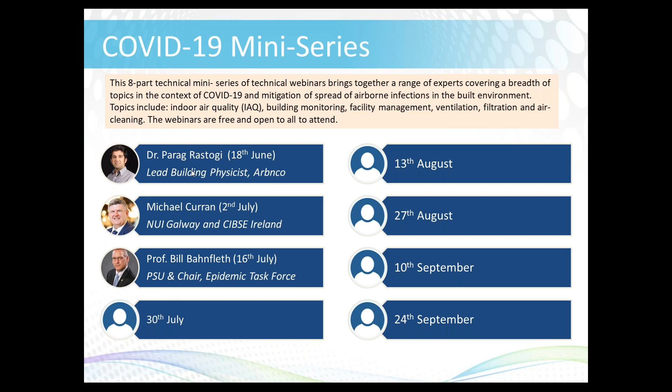So over the next couple of months, this is the first in an 8-part mini-series of webinars, which will run every 2 weeks between now and September. We're hoping to bring together a range of expert panelists covering topics related to reducing the spread of airborne infections in the built environment. The first 3 speakers are confirmed, including today's speaker, Parag. The topics over the next couple of months will include indoor air quality, building monitoring, facility management, ventilation, filtration, and air cleaning. And all of these webinars are free and open to anyone to attend.

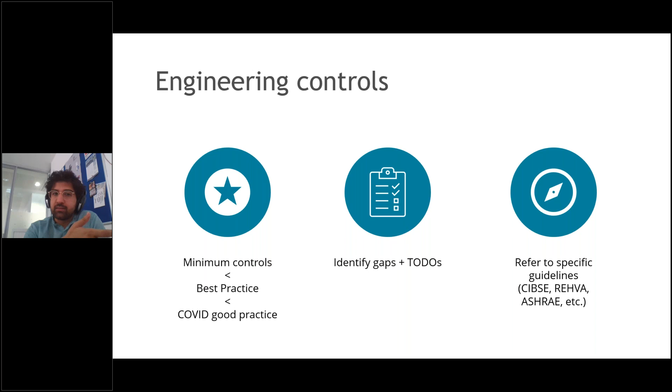Look them up. There's always scope to follow those. We'll keep the questions for later, so I'll move on.

So just to talk about specific engineering controls, I'll give a few examples from our own experience. The top engineering control that all societies are recommending now is increasing outdoor air ventilation to dilute pathogens.

Right? So the idea being, a person who's carrying the virus comes in, they shed viruses, and we have well-documented cases of people shedding when they talk, when they sing, when they shout, when they're just breathing. And that's not to say that you're somehow culpable for it. You may have no symptoms, you may have no idea, you have not been tested. So people are shedding viruses. That's something we have to accept, and we can't seek to control that 100%.

So increasing window ventilation, where possible, kind of achieves the same outcome, right? Outdoor air ventilation, one way of doing that is window ventilation, and no recirculation. And the reason this has come into the picture is, imagine you walk into a conference room. When it's been occupied for a while, you can smell the people. Your nose is a good detector. It tells you that the air is not fresh.

Now imagine that air is being recirculated to other rooms through the mechanical system and pumped back into the space. The things that you could smell, think of them as tracer gases. I'll give you an example in a second. And that is a good indication that if those gases can move with that air, then so can viruses, right?

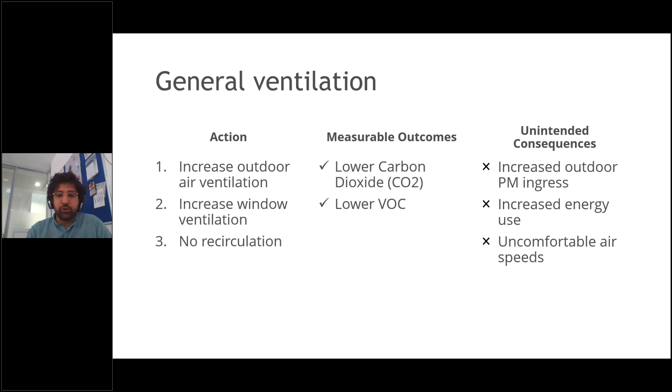So enough talking, let me get to an example. This is an office in Singapore operated in classic fashion for a hot and humid climate in Asia. They pre-cool in the morning and keep the temperature high by the standards of the UK and Ireland, but it's okay for people used to hotter climates. 27 degrees Celsius is not a bad thing. They overcool in the morning before people come in, then maintain that and let it slide a little bit.

But if you look at the CO2, it's a different picture. There are very serious ramps of CO2 every morning, and the level is persistently high. The ASHRAE minimum outdoor air requirements correspond roughly to a CO2 level of 1000 ppm, so they are barely meeting the minimum most of the time. We're not even talking about COVID good practice yet, just the state of the art. The humidity is on the higher end of what's recommended, and that's fine. We'll ignore lighting for now; that's not the focus of this project.

Just to give you an example of what that looks like. So in this particular snapshot, I was looking at every sensor in that office. It's a fairly big floor, and the office is spread over the entire floor. In fact, there's a couple of sensors on another floor as well. So this is really an overall view, which is why you should see some variation.

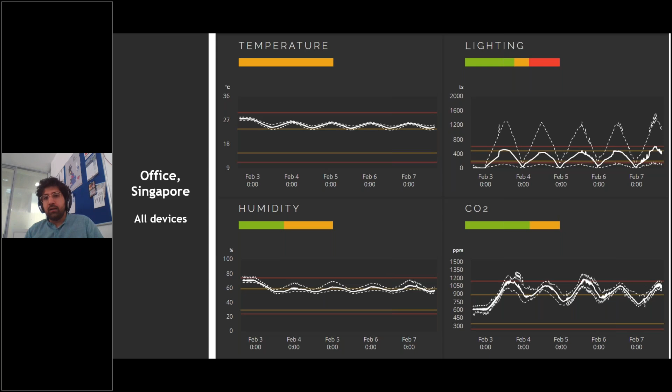What's amazing is you don't see a lot of variation, which means obviously that they have very good control. And so there might be a few outliers, some rooms that are behaving quite differently, but by and large, the office is very well controlled. So when you look at an individual meeting room, again, they were very concerned about humidity and temperature. And our feedback was, it's fine. There's nothing wrong with the humidity and temperature. You're doing a very good job of controlling it.

But look at the CO2. This kind of CO2 profile tells me that meeting room is either always crowded, or the ventilation system was not designed for the occupancies which are actually being practiced at this particular meeting room. So this for me is a red flag to say that, well, your ramp of CO2 is very steep. The CO2 level climbs very fast. Your ventilation system is not keeping up.

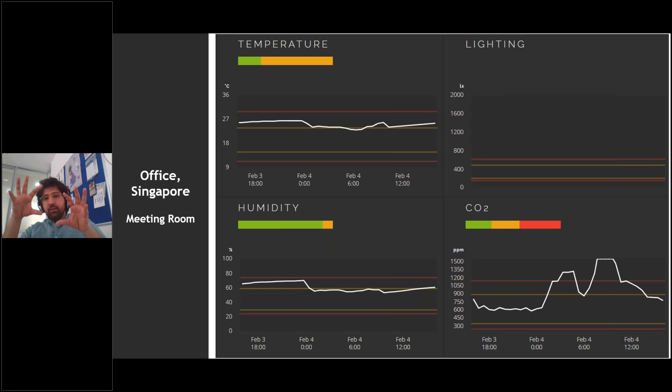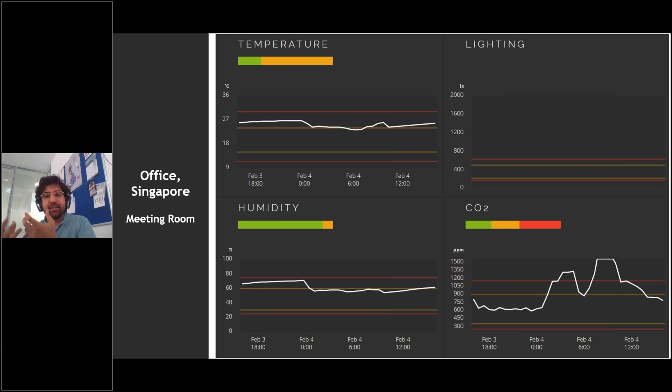You are not diluting the pathogens if there are pathogens in here, which is increasing, on the multi-parameter sort of calculation, the probability of infection. Fresh air is an aspect, and that aspect is actually suffering here.

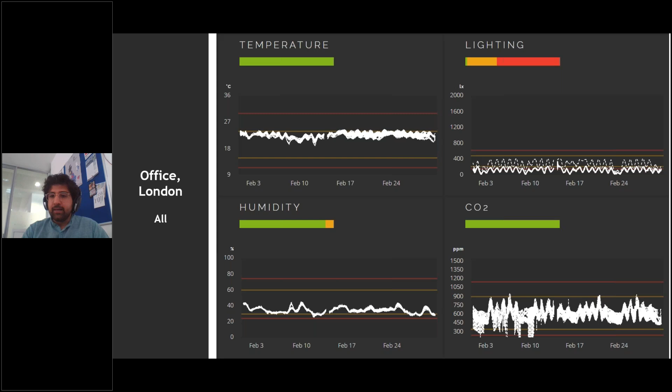But if you look at one conference room, actually, then the picture is quite different. So this is roughly the same time period. This is like end of Jan, or Jan, Feb in this case. So even though the overall picture was fine, if, for example, you had taken a spot check, you could have just by chance been in a place that was fine. There was nothing wrong with that place.

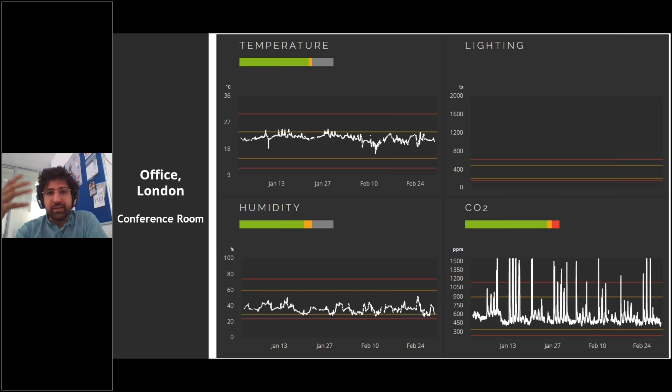And we actually had this discussion with another client who showed us a report of their spot check of the VOCs, so volatile organic compounds, pollutants in their space, and they said that it's fine. And yes, the report looks fine indeed. There's nothing wrong with it. But when you actually look at the continuous monitoring results, you find that there are points in the day where it is fine, and there are points in the day where actually the VOC levels are really quite bad.

Now, is that a serious problem? Well, I don't know until I go on site. I mean, I don't need to go on site, but the client goes on site and figures out where are those VOCs coming from? Are they from cleaning products? Are they from furniture and so on? So the point of that aside was that individual spaces in an office might have actually radically different behavior from the rest of the office.

So when we talk about verifying and measuring things, your policy, which is for the entire office, may actually not work out at all for a particular space in the office. And so you just look at the ramps that you get and the peak load, as it were, of CO2 that you get in this particular conference room.

And this graph was great for me as sort of a validation, because when I presented this to the client, this graph immediately caught their attention: oh, we kind of anecdotally knew that our conference rooms were getting a bit crowded and sort of warm and stuffy, but this is just plain to see that every time that conference room is used, pretty much it's overcrowded and the ventilation's really not keeping up.

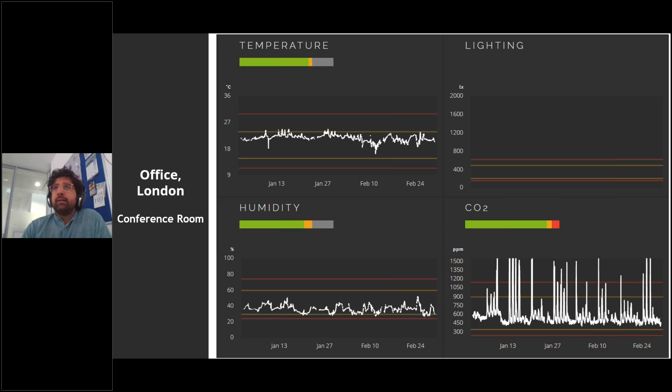Just to give you an example of the fact that when this room is not occupied, it does go back to fresh air levels. So I guess I'm trying to say I'm not making up that data.

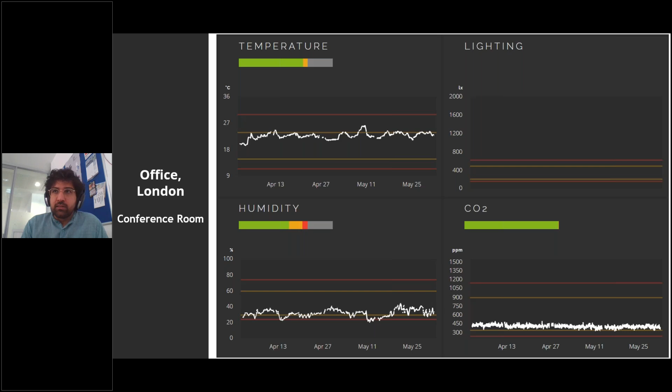So if you look at that same conference room in April and May, when that office was shut down, we know for a fact that it should be at the background levels because nobody's in the space to produce CO2. Now, again, CO2 is produced by a person in the space. So if there's no people there, there's no CO2 in that space. Also, there's no viruses being produced there because there's nobody to produce those viruses.

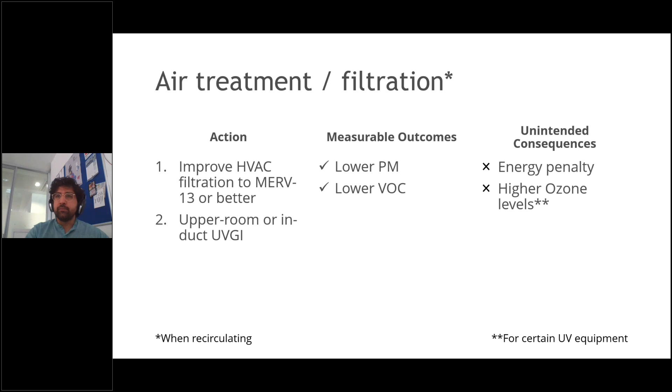Just to give you an idea of how you think about recirculation: while in an ideal world I would never mix air between zones, that's not really realistic in most offices. I'll use this office as an example because they are actually a site office in central London. There are still about 30 to 50 people who work in that office regularly, and they have to work there for almost a year. So their health, well-being and productivity is being affected by this office.

If you walked into their office, you would understand immediately that there's something wrong with the ventilation, because there is absolutely no way they can avoid recirculation between spaces, because of the way it's constructed and the constraints of the site. They're actually a construction office; they're supposed to get out of there when the construction is done.

To give you an example of the lack of fresh air in that office, and where perhaps air filtration could actually be beneficial, look at their pre-lockdown profiles of CO2. Looking at the overall picture again, they're really, really high. And in this case, I know why that's happening. It's because there's terrible ventilation and a lot of mixing in that space.

The PM level is not too high, but it's way higher than most offices should be because it's right next to the construction site, and there was no curtain between the construction site and the office to prevent the dust coming in. What's interesting is that most of April there was virtually no activity. Nobody was in the site office, and then they started coming back to work little by little.

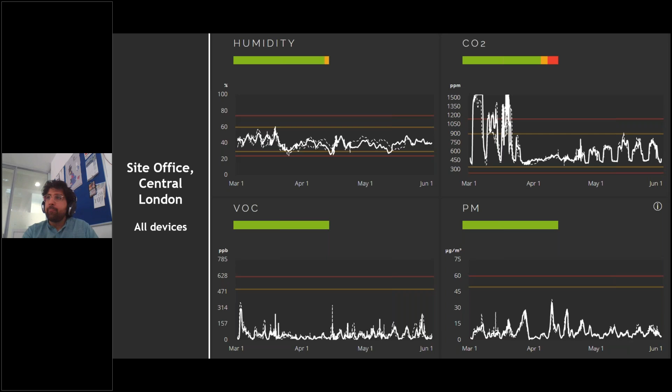I think this is the office I was talking about earlier in London again. Speaking of recirculation, in this case let me use a slightly left-field example of VOCs as a tracer gas, because obviously I can't measure viruses, right?

So going back to our first office that we discussed, which had the conference room behaving completely differently from the overall. Let's look at that office again, and we see that the CO2 level background is fine. It's below. There are some small spikes. It's a lot of data bunched together, which is why you can't see individual lines. But by and large, almost all the sensors are at background levels because virtually nobody is going into the office.

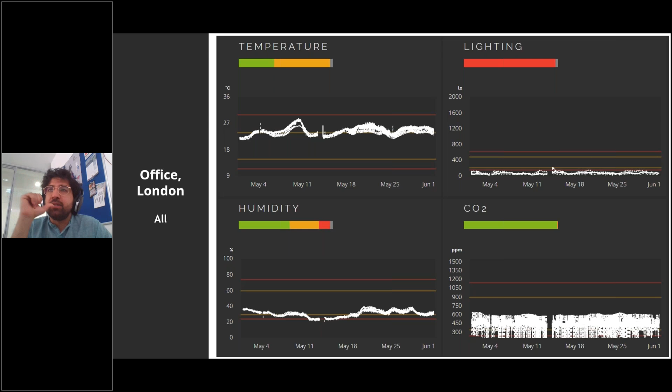It's very sporadic occupancy. However, in May, there was a heat wave, right? So we have a sensor in that office in the reception area, and the reception area is fully glazed. What that means is that we had a lot of VOC production. This is not cleaning because there's nobody going in there. This is not food. This is purely temperature-related off-gassing.

Now, why am I going on about VOC? Because this is a perfect example of where something that's generated in the reception will now propagate throughout the space because they're all connected. So even though technically there's no mixing happening, some amount of recirculation is inevitable. So this is a kind of tracer gas, as it were, that we could use to verify whether things are moving from one zone to another.

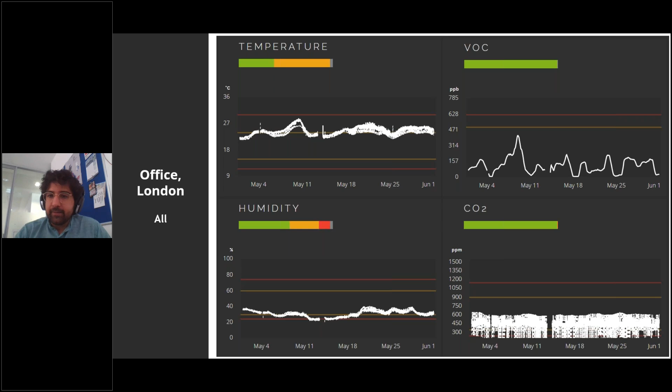Moving on to local air treatment, I won't spend much time on this. That's not really part of my expertise, but the current guidelines do tell you that you can use portable room cleaners with heavy caveats, and I would recommend looking at the CIBSE guidance and the ASHRAE guidance on when this is actually effective. For example, the CIBSE guidance says more than 10 square meters is unlikely to be effective.

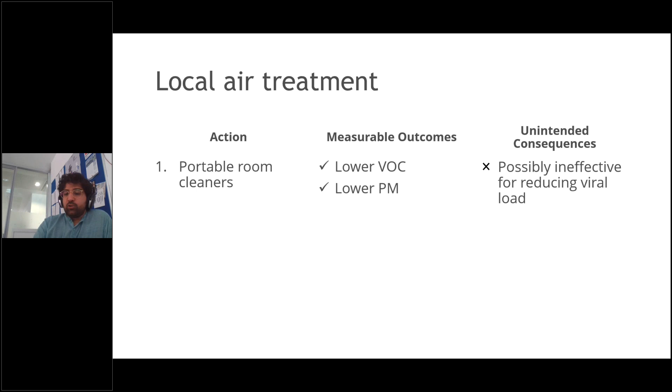Because think about it this way: you have this relatively tiny cleaning device, and it's trying to get the air through it. And if you just have a lot of airflow and a big space, how much effect is it actually going to have? So yeah, I said possibly ineffective for reducing viral load. And of course, source control and elimination.

This is one aspect that a lot of people don't like to talk about, but I think it's worth talking about because it is quite important to remember that a big way of transmitting viruses of any sort, not just COVID, is actually the fecal oral route. So when you visit the toilet, you smell things and it's unpleasant. To quote my friend Dr. Jovan Pantelic, if you could smell the viruses, you would realize how smelly a toilet actually is. So the smells are giving you a proxy for the lack of ventilation.

So you really have to think as a building owner, building operator, an engineer, that toilet exhaust has become even more important than it used to be. It was always important. There are other viruses and bacteria that can be transmitted from toilet usage, especially in public toilets. And I'm not talking about surfaces, I'm talking about the aerosols. You have to really look at how your toilets are generating aerosols. There are different technologies of toilets, what the exhaust is doing, whether the exhaust is actually being extracted and thrown out into the outdoor air or not.

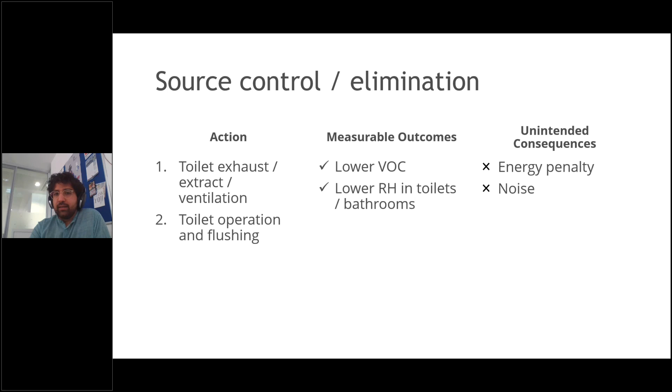And that's something where, again, there are some measurable outcomes. And in all of these, energy penalty is something that we have to be careful about, although I would argue that it's not as bad as most people think in terms of energy outcomes. So again, looking at our favorite office in London. I like this office because I happen to go there a lot, so I know it very well, and we have our sensors in that space.

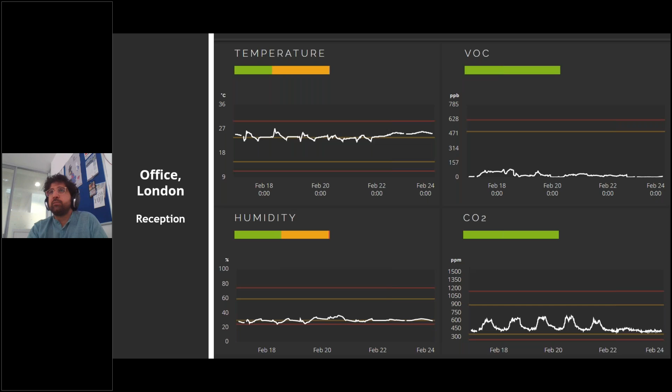An example of when suddenly you could have spikes if you were to walk into an enclosed space is the reception area. I said it's connected to all the other spaces, but the moment you shut all the doors, it becomes a fairly enclosed space. So again, when the temperature was high, we had VOC spikes. Let me just do a thought experiment and use these VOCs as a proxy for viruses. Now you walk into the space, instead of smelling the VOCs, you're gonna smell the viruses, and you would realize what a high load of viruses there actually is.

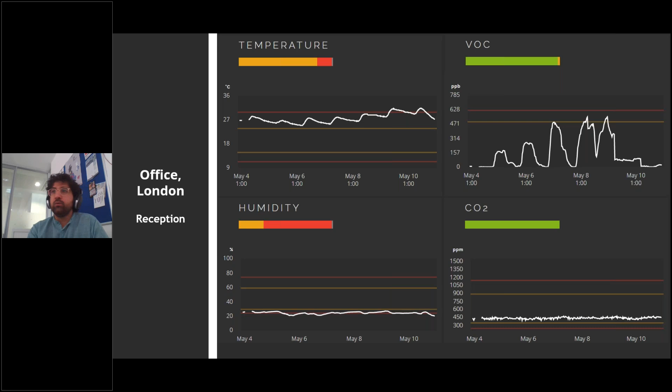Of course, in this case, nobody walked into the office because nobody was supposed to go into the office. So the CO2 level is actually very low. And of course, there's general IEQ. Towards the beginning, there was some talk, especially in Asia, about shutting down your air conditioning because air conditioning is spreading the virus.

It's like, well, it's not the air conditioning itself. Of course, the recirculation and all that is an issue. And in fact, that's one instance where human intuition goes wrong, because lots of people think that colder air is fresh air, so fresh air and colder air are often confused with each other.

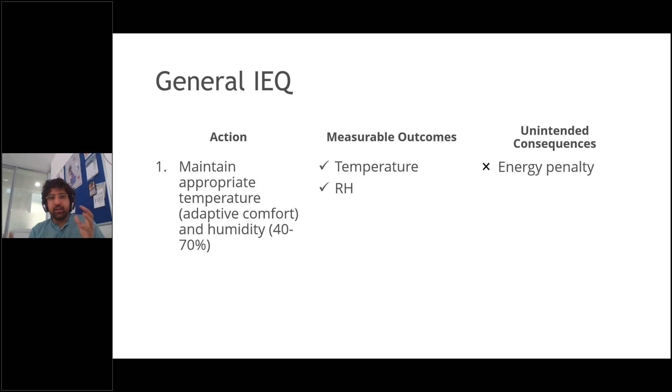So for example, in this case, we looked at an office in central Scotland, and we realized that there are parts of the day when the temperature and humidity do drop quite significantly, and that's not great for immunity of the workforce. There is some new evidence that the virus doesn't do so well at higher humidities and higher temperatures. So being on the top end of the acceptable humidity is probably a good idea in this case.

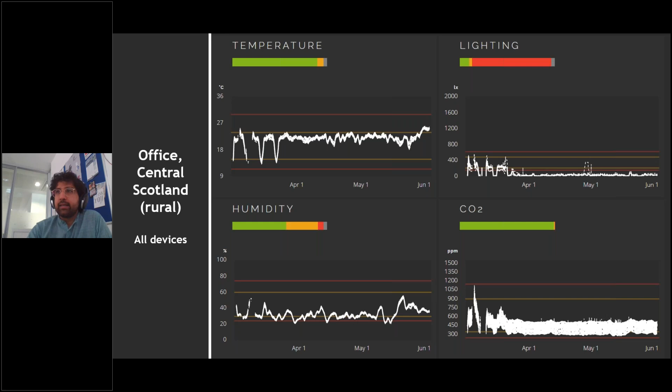So let me finish off with a few points. We need to start measuring outcomes, because if we don't have visibility, we don't have a direction of where we need to go. Because this is not going to be a straight shot: install a meter, you have no viruses, good to go. An improper implementation can sometimes increase exposure while generating false confidence, which is the worst of both worlds.

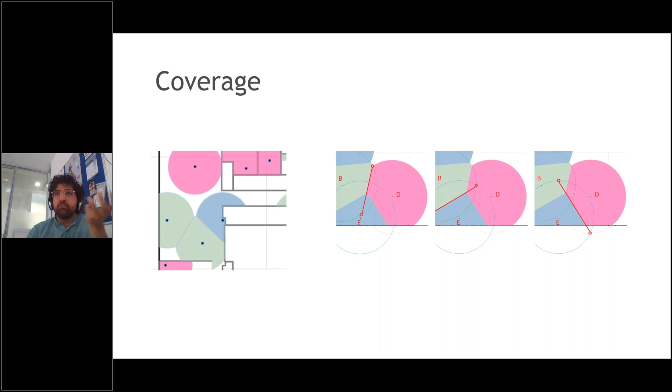We've been doing some work on coverage with ARC, which is USGBC, and we can talk more about that later, how you can actually calculate and quantify the coverage of each sensor, so that you can have an idea of what is the right number of sensors roughly that I should have in a space. But broadly speaking, you're trying to hit almost all the HVAC zones and areas of high interest, such as meeting rooms and toilets, right?

Occupant engagement definitely needs an update, because we need to go from this paradigm of pick up the phone and call somebody, and maybe your complaint is answered or not. We probably need to have more signage, and this is in the guidance now, and move that towards active engagement and encouragement. It is your building, you are occupying it, your comfort is important to me, your safety is important to me.

So we need to indicate to people and train people, and maybe there are smarter ways of doing this, asking them how policies are working, because they are your eyes and ears. As a building manager, or as a building engineer, you can't be everywhere all the time. And if you look at OSHA's guidelines, that's what they actually recommend as well.

And don't forget that there are unmeasurable outcomes. User acceptance is an issue. You need to be aware of the fact that when people walk into a space, they need to accept that space. They need to feel comfortable. They need reassurance.

So, at the end of the day, even if a lot of this turns out to have been overkill, what's the worst outcome that can happen? You made a healthy building. That's not the worst outcome in the world, because it's not just COVID that matters. There are other viruses, and we all know that there is now a lot of evidence that the lack of fresh air or pollutants in the air impact health. Airborne transmission is very likely, and so that necessitates building level action as well.

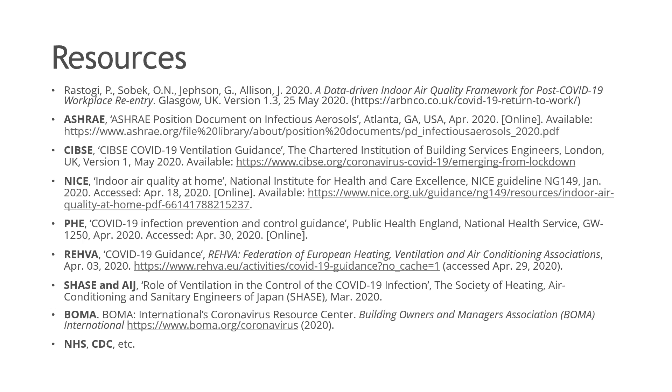So maybe a quick question regarding the examples you showed. What ventilation systems were installed in the office examples that you showed?

So do you mean like which brand? I don't know which brand it is. I think what type of systems? I can't remember off the top of my head. But what I do remember is in this case, yeah. Sorry, I'll have to look that up and get back to you. I don't remember off the top of my head which one I was looking at.

Yeah. What's interesting about the office in London, though, and this might be of interest to some people, is that this is a complicated case where the building is managed by somebody else, and this is one tenant in the building. So we are only able to measure what's happening in the tenant space. We're not actually able to measure what the landlord is providing as fresh air or as chilled water or whatever it is. And that's a complication where the tenant can do some things, but they can't do everything. But we can only measure in the tenant space.

So in this case, we had to do some sort of mediation between the landlord and the tenant in terms of, well, okay, this is not really anybody's fault, but we need to change this operating procedure and blah, blah, blah. So I can look that up and get back to you. Yeah. Okay.

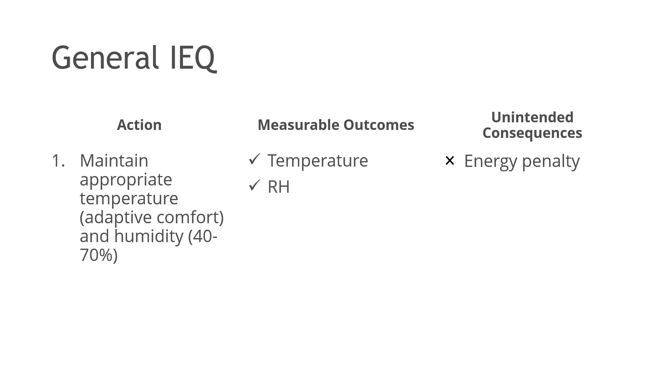Another question, any comments on electrostatic filters? No, I'll give you a second-hand comment from Bill Bahnfleth's presentation, and Bill is really the best person to talk about this. But as far as I know, the current guidance is they're not recommended. For the details of why they're not recommended, please read the ASHRAE guidance on that, and listen to Bill's seminar 4 weeks from now. Yeah, so Bill will be on one of these seminars. He's confirmed for the 16th of July at the same time.

Yeah. Another question, how many air changes of fresh air or recirculated air that is free of viruses would you recommend for a room? So yeah, I haven't really been working for a long time in air changes per hour because I'm really focused on outcome of what can actually be measured. Okay, I'll make a sort of controversial statement and then I'll clarify why I said that, right? It doesn't quite matter how many air changes you think you have, what you're actually pushing into the space. What matters is, is that adequate to dilute the pathogen that's being generated there?

So yes, of course, I'm biased in favor of sensors because I work with sensors and I think they solve all the problems in the world. But the point here that I'm trying to make is that if your CO2 starts climbing, it means your ventilation system is not keeping up, right? So for example, the ASHRAE and CIBSE guideline says, keep your ventilation on all the time. That's fine, especially when it's occupied, fresh air should be on all the time. But they also say, keep it on overnight as well.